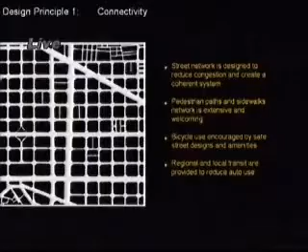A very simple theoretical framework, 5 ideas. Connectivity, in the sense that opening up multiple ways of circulation of various modes within a project basically allows access and the proper functioning of these various modes and uses together. Everything that we do needs to end up in an urban structure that renders public space. I'm sure you have this experience in many fabulous historic and traditional contexts and places in Florida.

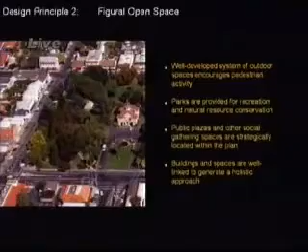For 50 years we've built buildings loose in space. What we want to do is build buildings that actually, as they get built, generate that space. Urbanism is the space between buildings; architecture is the making of single buildings. Placemaking depends on open space formation and its landscape.

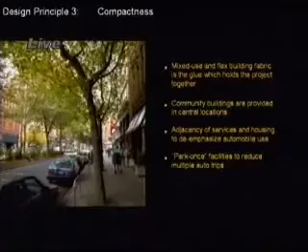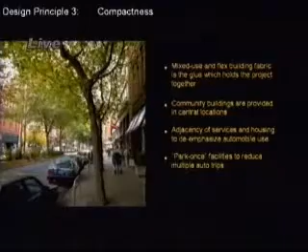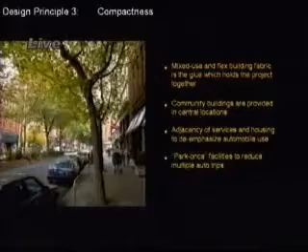Everything that we do in mixed-use development has to do with the arraying of uses within a compact, walkable precinct of about roughly quarter mile in radius, so that a variety of building types, uses, and adjacencies need to be encountered within that quarter mile. It's this crunching together of life and activity and the transportation systems that support it within the smallest increment of space that allows urban places to evolve.

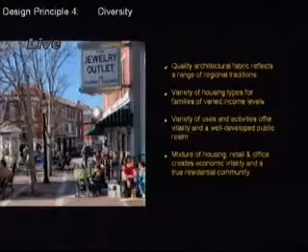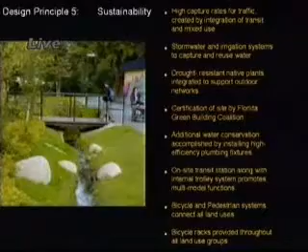Within that district of a quarter mile, there needs to be a great deal of both architectural and typological and place variety. And finally, there needs to be a framework built of sustainable buildings, sustainable infrastructure, and sustainable transportation means, including people's feet, that drives this project towards the greatest goal of sustainability, which is permanence.

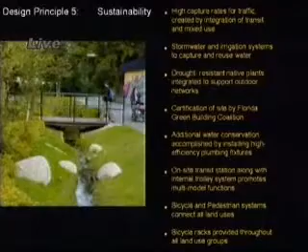Whatever we make needs to be there forever, like downtown Sarasota, and not like the strips we built between Sarasota and Venice that I witnessed this morning driving over to come here to speak to you.

I also want to frame my comments from the perspective, as I did last time, of this being experimental on the one hand, but not entirely new. There are both great historic places, including the town we're in, that come with a tradition of such placemaking, including its retail, and there are new projects in many places in Florida that have been made recently and are functioning profitably on the private side and expansively on the public benefit side. I think those are precedents that we're going to take very much into consideration.

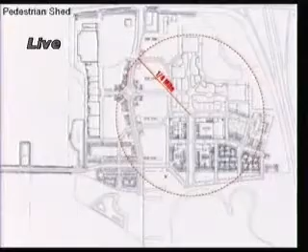Now on my narrow presentation on the project, a very important aspect of the scheme is that it's actually district size, a quarter of a mile in radius. It can combine all the ingredients I spoke about. That's a unique and extraordinary opportunity.

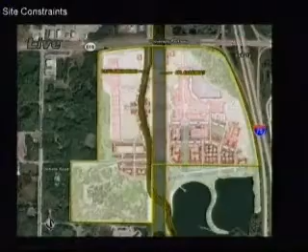Within that, I want to point out to those of you who don't remember or know this subject, that there's a major utility right-of-way, a high-tension wire right-of-way, in the middle of the project. And this is the Cattleman right-of-way as well, which we're trying to modify to some extent, but which has to some extent find its way on the west side of the right-of-way. So those are two fundamental, large-scale constraints that need to be accounted for in this project.

The way we reformed the project in the last month was by casting it as a very intimate network of streets, blocks, and lots within the blocks, including the mall, so that over time, and particularly under form-based code provision, this area could evolve continuously.

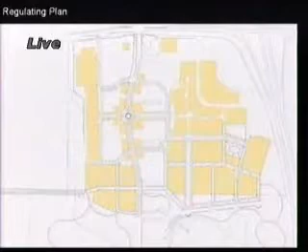I think it's an important thing for you to think from your perspective and the perspective of your constituents, how to cast this project today, tomorrow, and for the next five years. But actually, the long-term life of this project is at least as important as the decision to do it now.

So there needs to be in place an urban framework, an urban structure that sustains this growth over time. For example, in 25 years, the land value might be large enough to take the wires underground, or a technology might come about that eliminates the wires. At that point, the remaining land should be there in a structure that can sustain proper and orderly development.

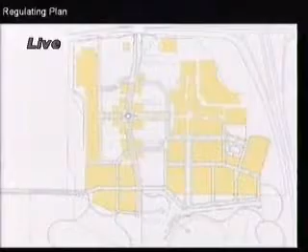On the use side, I want to point out to you up front that we are seeing the power center pretty much unchanged because of commitments made to actually develop that way on the west side of the project. The mall is in this location with its parking behind, hidden by the large grove of trees. This stand of trees I also visited yesterday, and I'm absolutely certain that this part of the site will not be visible from the highway.

There is a liner building, a building attached to the mall on this side that actually begins to generate the main street, with retail on the ground floor and office above. This color is a commercial mixed-use color, so there's retail and commerce here as well. There's a hotel in this corner, a small one and a larger one here, with retail lining the edges of the hotel. The retail comes around the main street here with a multiplex there. There is a garage plus street parking that services this portion of the commercial project.

These are live-work units, housing on the light ochre, and then possibly office in this corner, and on this side around the roundabout, retail that is what we call the glue that connects and directs entrances to the principal points of retail entrance for this larger project surrounding it.

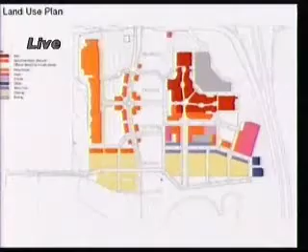And all of this, as I pointed out in my theoretical comments, is contained within the quarter-mile radius and compactly arranged within a road system that, as you see from this slide, connects everything to everything, and a pedestrian system that allows people to walk from everywhere to everywhere.

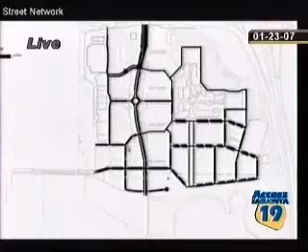Now, looking back at this drawing, it is also important to note, and Jim Desa, whose comments will follow mine, will talk about this in greater detail, that one of the important aspects of this project is it continues the arterial network of the county by allowing both DeSoto and Cattleman to come through this project and service it, and by allowing multiple ways in and out of this precinct, while at the same time developing the form of these roads in a pedestrian-friendly way. So, hopefully, part of a form-based code of standards for this project would be the casting of the streets in their appropriate form, which is both car, transit, and pedestrian supportive.

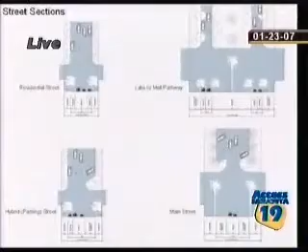The time has come to begin to think again about road making as being an aspect of development, not an aspect of moving cars and cars alone.

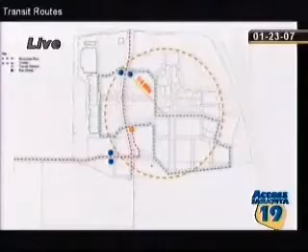A significant addition to the project was the inclusion of a transit center, which you see located off Cattleman right here, a couple of bus stops for lines for both Manatee and Sarasota County buses moving through the site, and then a loop road, which does not have to be in exactly this configuration, a similar configuration that connects all the pieces of this puzzle together and allows people the possibility of parking once and experiencing the site in a variety of other modes.

The open space framework is a particularly important aspect of the project because there are at least 2 or 3 different kinds of open space. There's the space that is dedicated to conservation, which is on the edges and left to various purposes, the least of which probably is being used extensively by people. Then there are parks that are distributed in some form or another throughout the project, and then there's the question of the public park on the lake.

And I want to some extent address the comments of Mr. Thaxton. It seems to me that the primary public benefit of including a road in the park is that, in the interest of integration, we wish to bring the park into the project and the park into the county. In other words, the width of the park is almost half a mile from Cattleman to the freeway.

And if there is no road and there is no parking to get into the park, it is very difficult, if not impossible, for people to actually come in by car and be able to take advantage of it. Similarly, I think it is very important for people who actually live in this project to come through to this park. And it strikes me that, unlike your analogy of two private parties actually living next to each other and having to accommodate the making of a road, I think you should read this as not a situation where we have a shortage of loaves, but one in which we can actually bake more loaves, because this is a situation in which—

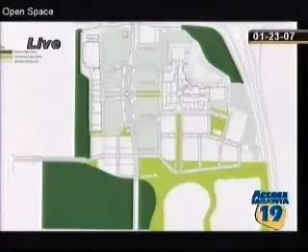—the lake is unfinished, is a work in progress. The county is actually floating a whole road through it. Cattleman right-of-way goes through this lake. The form of it is incomplete on the edges. It needs to be formed better. There are all kinds of environmental projects that need to be actually carried out there in order to bring it up to a level of performance that's acceptable.

And it might very well be that as part of this process of framing the edges, we enlarge the land against the lake to some degree, maybe to make up for the amount of land that's being taken by the road, or maybe even to make a larger, more significant park. I think there is the possibility here of making a very significant park, a very beautiful park, maybe on the east side near the freeway, with this road providing access to it.

It is a unique opportunity for this thing to become something other than a leftover piece, which it could become, or which it typically becomes in the case of integrated suburban projects, into a major public park, which is both appropriate in size and form and connected by car and by pedestrian traffic.

And finally, the massing of the project itself. These are large one-story buildings for now. The garage is 2 stories in the back. These are 2-story commercial buildings. These are mostly 2-, 3-, and 4-story residential buildings, and in part higher-rise, mid-rise buildings, up to 85 feet. One of our commitments was to press the height of the building down and spread it out to make appropriate block sizes and public space within the project.

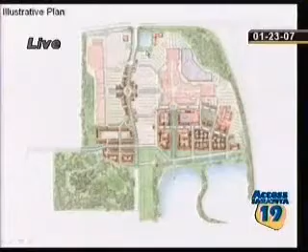You should recognize that in this drawing we're showing these green lines inside the parking garage and the parking lots. I'll talk to that in a second.

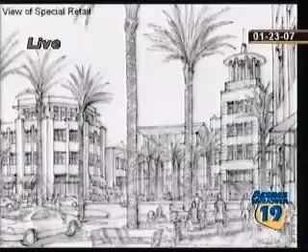These are images produced in the charrette in December that show the main street with parking on the street, retail activities on the ground floor as well, and mixed-use office lofts above. This is a similar view, 90 degrees from the other one, showing an enlarged, prominent entrance to the mall with 3- and 4-story liners on the main street.

And finally, an enlargement of the mall entrance on the west side, showing a highly landscaped entrance from the roundabout with both trees and flowers, and a continuous pedestrian arcade for protection from the weather.

It has a dimension of conservation, as I spoke about before, and a dimension of this public-private park and the esplanade in it, which showed a pavilion inside the park, a fishing pier, and perhaps even other facilities for enjoying the lake could be included here.

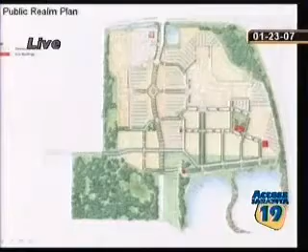There are parks here, for instance a park here with a mercado on it, a market that I will talk about in a moment. And most importantly, there is an understanding that street hierarchy and street quality is made by appropriate choice of street materials.

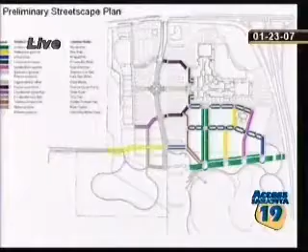So this is a preliminary list and diagram of street tree form and street tree palettes for making that public space right.

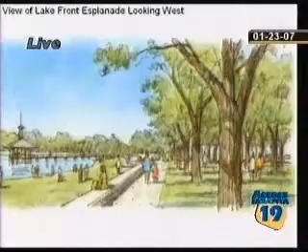And I think this view of the esplanade, Commissioner Paxton, is the one that probably expresses more than any other the fundamental reason for allowing a road and parking, which you can see to the right of this perspective, to be allowed in this area, because this is the only way you can ever get this kind of place and this kind of appreciation and enjoyment to happen with this many people.

It is really a way of getting not only the people who live here, but people from all over the county, visitors and others, to actually come to the edge of the water in a way that is inviting and positive through the making of an esplanade of this kind, and perhaps even a beach and the pier structure that you see here.

Excuse me, so the road's pretty close there to the edge. Are you saying if it were a little further away, it would attract fewer people?

Actually, there was no provision when we received the plan for an extension of DeSoto, and the distance between Campbellman and the freeway is almost half a mile, which nobody would ever walk to come to a lakefront. You would have to have some way for people to penetrate by car and come and park in a place like this, or park inside the town center and walk down to this place.

And is that parking over on the right? Yes, there is a road with parking there, and this parking would also be diagonal parking if we so choose. The road is further away still, about 200 to 300 feet from the waterfront, and it may be possible to park there diagonally or otherwise. Again, the details are subject to discussion about the size, arrangement, and function of the park. But I think the possibility of making this a premier park in the county is very real, in a public-private partnership.

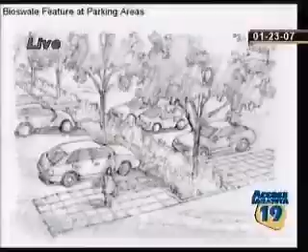Excuse me, Commissioner Staub. Well, it's good to say investigate. However, it's proven that retail really is better with green buildings because of the lighting, people spend more money, plus there's cost savings of operating the building, and employees are healthier with less turnover. So when we say investigate, I would prefer to see a commitment to building green, which wouldn't have to be all LEED certified, because that has become, I'm told, an exorbitant amount of money to get certified. There are possibilities of doing all the elements to qualify for LEED without actually getting the certification. So I would like to see more than an investigation, I'd like to see a commitment. I'm not saying LEED Platinum or Gold, but to integrate as many green elements as possible in every building, because I think it's important for your future.

The reason my words were measured on the subject was because by investigate I meant determining what level of greenness each building would be built to, instead of making a fixed commitment. Be very careful what you say to us. Yes, I understand, I appreciate your passion on the subject. Okay, I am starting the clock again.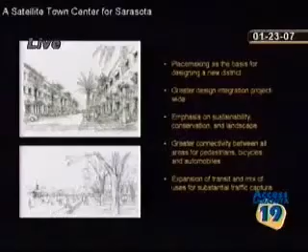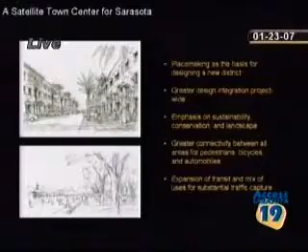Placemaking as the basis of designing a new district, greater design integration of the project on a project-wide basis, emphasis on sustainability, conservation, and native landscape, greater connectivity for all modes, expansion of transit, and the possibility of enlarging traffic capture within the project, reduction of height to 85 feet, expansion of work, live, and office facilities, redistribution of the built fabric and the form of the place, increase in the number of parks and streets, integration into a network of public space, and making parking lots into water gardens. These were the essential points of criticism from you and your staff that we took as a point of departure and incorporated into the casting of the new project.

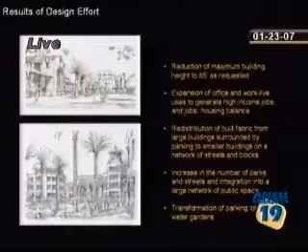Thank you for your time, and I would ask Jim Desa to come up, and I'm sure we're all going to be open for questions later. Thank you. Thank you.